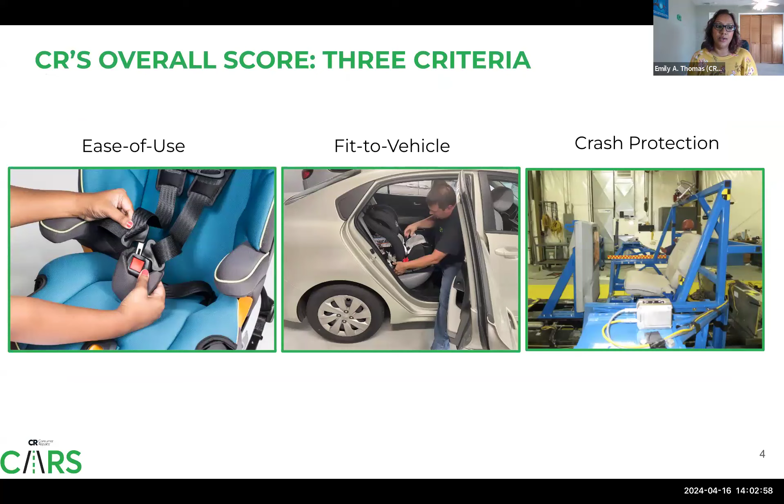So to start off, we'll begin with the child seat test program. Our overall score is broken up into 3 main areas. We look at ease of use, fit to vehicle, and crash protection. In our ease of use, we're really looking at how is the average person going to be using the seat? What are the potential areas for misuse? All the different adjustments that need to be made, are they easy to accomplish?

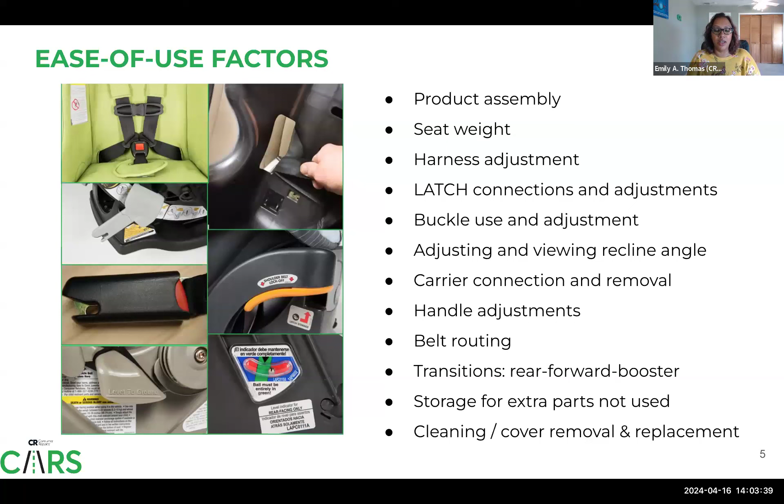Is it difficult to access these things like harness adjustments and crotch buckle adjustments, the lower anchors, where do you store them? Where do you keep the manual? Belt routing, all of these different areas. We really want to look to see where there's potential misuse opportunities and evaluate based off of that. We also look at the labels that are on the model itself.

One of the key things we try to drive home is making sure that if there is restrictions on usage on the seat, that the seat itself has that labeling right at those points of touch. So for instance, for all of the different inserts that come with your car seats, if you can only use them up to a certain weight limit, then we like to see that right there on the insert itself, because we all know that people don't hold on to their manuals, or they have it but they don't open it.

And so whatever can be put onto the seat labels itself that is really important for your everyday use and to ensure that there's no misuse, then we're looking for those things. Things like chest clip location, how to know when you should adjust the harness height, proper routing, all of these different areas. We do also give credit if the seat has Spanish labels, and later you'll see also if it comes with Spanish instructions.

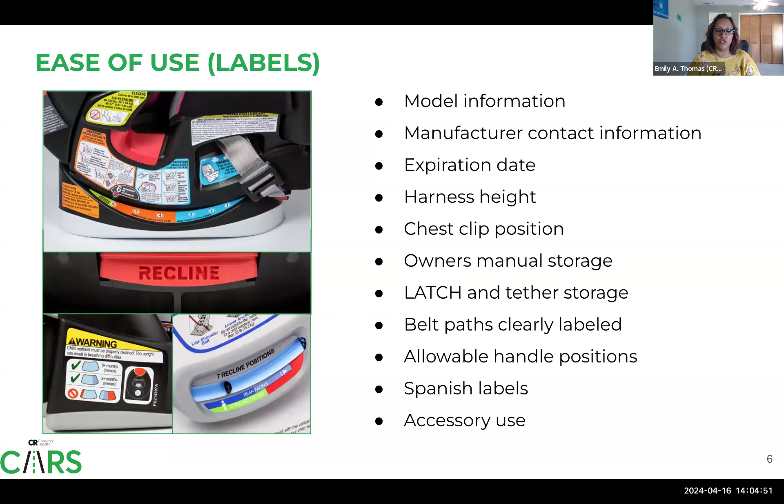So we do the same evaluation with the owner's manuals as well. If they do open the owner's manual, does it have all the information that they would need? And is it outlined clearly? Are there pictures? Do the pictures match the text? And do they match the seat? We do look for harmony between the labels and the owner's manual to make sure that there's no discrepancies that would lead to confusion.

We want to make sure that for soft goods, how to remove the soft goods for cleaning is described in the manual, how to clean them properly, and how to put them back. If you've taken soft goods off before, you know that sometimes taking it off is way easier than putting it back on, especially if the instructions only tell you to reverse your steps.

So we want to make sure that all these things are properly outlined in the owner's manual for the consumer. We also look for things like sources of installation help. So, does the manual tell them where they can find a CPST?

And we also look to see, with the labels and the manuals, are there videos that the consumer can access from the manufacturer? So sometimes they include online instructions or online video instructions. It has to actually be instructions about installation. It can't just be a marketing video. So we do watch to make sure that there's verified videos available from the manufacturer itself.

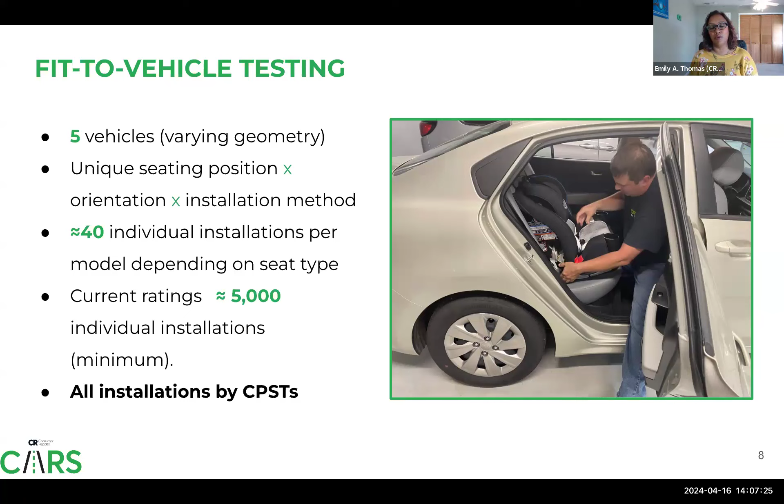And our current ratings has approximately 5,000 individual installations that go into them. And that's the minimum. Oftentimes we have to do multiple installs in the same seating position in order to see, can we get a better fit? Are there any tips or tricks that we can provide as well to help them get a better installation? And everyone on our team who does the Fit to Vehicle installations, they're all CPSTs.

large waterfalls, all the different things that make it really tough sometimes to get a good install, wide belt anchor spacing, perhaps top tether locations that are very close to the vehicle seat back, lower anchors that are close to the seat cushions, things of that nature. And so the idea is that if the car seat can be installed securely in these challenging vehicles, then the likelihood that you can get a good install at home in your car that's perhaps not as challenging is higher.

So we look at whether or not we're able to get a secure installation, but we're also looking at the car seat's compatibility with the vehicle. Is there enough room to get the installation? How does it impact the adjacent seating positions? Are you able to close the door if you have the seat installed in the outboard seating position?

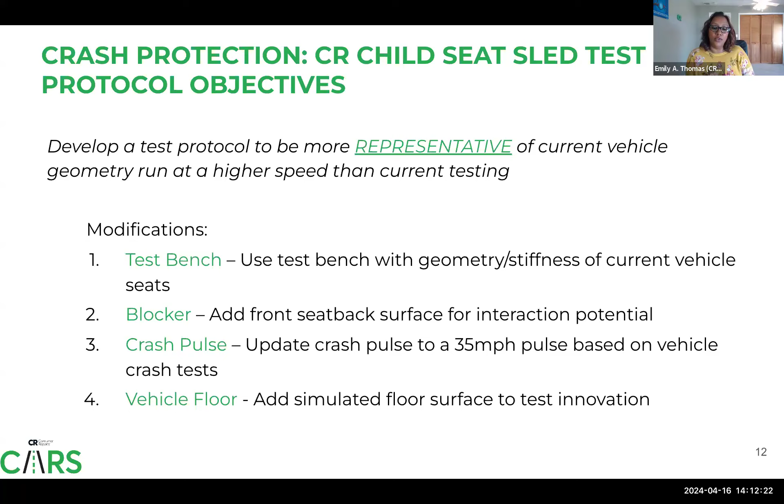Additionally, our crash pulse is a higher severity crash pulse than the regulatory tests. We use a 35G, 35 mile per hour pulse, and this allows us to differentiate seats compared to the regulatory minimum. And then lastly, we have a simulated floor surface to allow us to test additional innovations like load legs.

So we developed our blocker plate by using video analysis of the front seat movement in vehicle frontal crash tests. Essentially, it was designed to have built-in rotational capability. In a real vehicle, there is some flexibility to that front seat back during a crash. It will rotate forward during a frontal crash. We wanted to account for that on our sled, but it's too difficult to have that exact same amount of flexibility be repeatable for every test. So we built in the rotational capability as part of our test setup.

When we are installing the car seat on the sled, the blocker plate is set to 78 degrees. We then translate it fore-aft until it meets the manufacturer specifications for a rear-facing seat. So whether that is just touching, braced, a 1.5 inch gap, whatever it might be, we will translate the blocker to that.

And then after we bolt it down, we rotate it up by about 10 degrees, which accounts for approximately 4 inches of movement that you might see during a real crash. This allows the car seat to have that additional movement and the room for it that it would also have in a real crash. For forward-facing tests, the blocker plate is set at 28.5 inches from the lower anchors, and that's for all forward-facing tests.

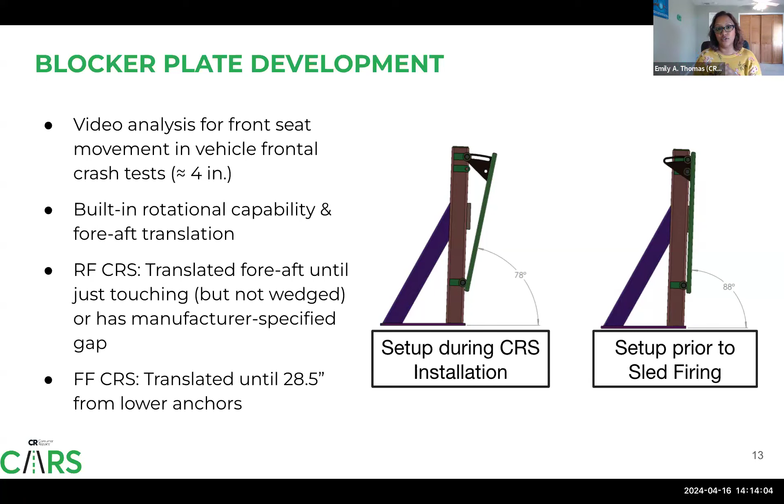Our simulated floor allows us to test innovations, like I mentioned, specifically load legs, and we wanted it to be representative of vehicle floors. In real cars, the vehicle floor is a much larger piece of metal with bumps and ridges. But because of the way the load leg interacts with the vehicle floor, it tends to be more of a point load. So it's okay to have a smaller piece for the sled purposes.

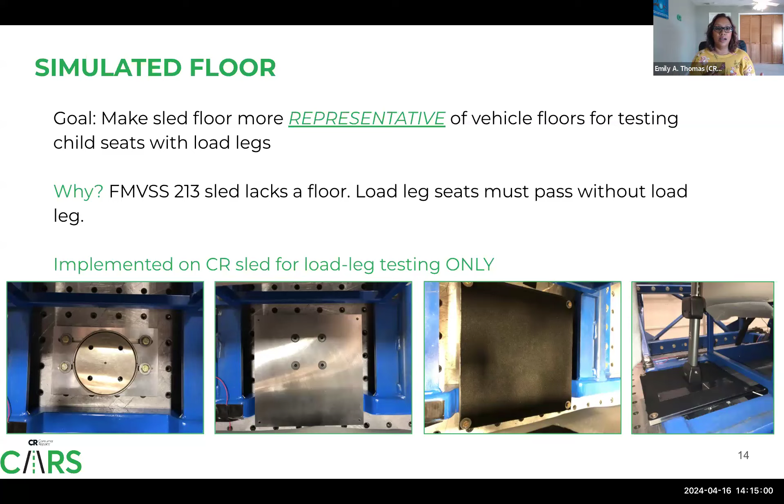Unfortunately, the regulatory test lacks a floor. So car seats that have a load leg have to pass the regulatory test with the leg folded, so they're not gaining the additional benefit that a load leg provides. But in our testing, we're able to test with it and see what that benefit is in the crash numbers.

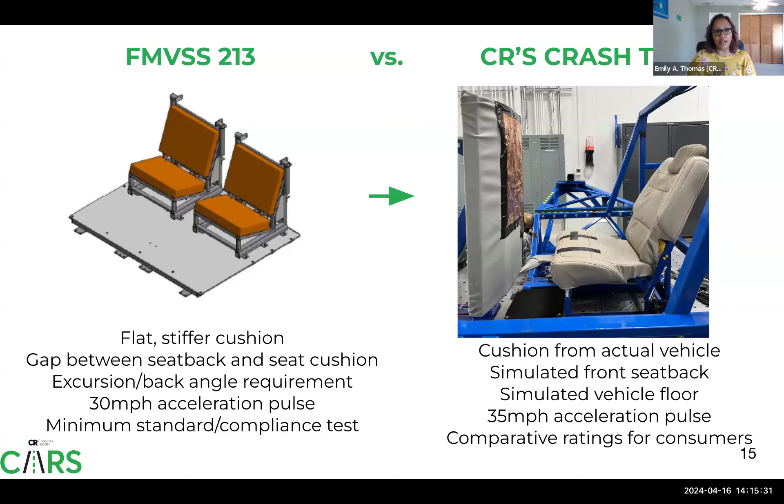So the key differences between our crash test and the federal standard are that we are using cushion from an actual vehicle, we have implemented a simulated front seat back, and we also have a simulated vehicle floor. We're running our tests at a higher severity, higher energy pulse, and we're meant to provide comparative ratings for consumers, unlike the regulatory test, which is a pass-fail test.

So why do we use a higher energy pulse? This is a quote from a paper discussing the NCAP, or New Car Assessment Program, which also tests at a higher speed than the regulatory crash tests. Really, when you have the regulatory crash tests at one speed, that's your compliance pass-fail. If you want to determine crashworthiness differences, you have to go beyond that minimum, beyond the regulatory standard. Raising the speed allows us to more easily distinguish any crashworthiness differences.

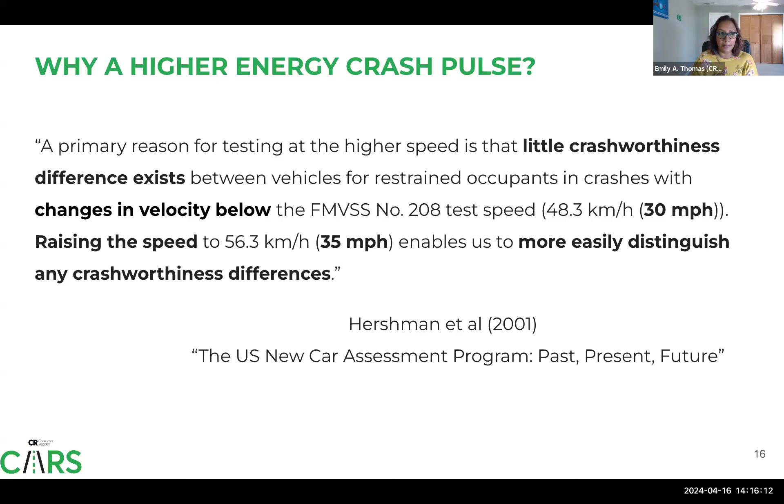So our crash protection rating is not a pass-fail test, as I mentioned. It's comparative ratings of relative performance within a peer group. So infant seats are rated against infant seats, convertibles against convertibles, etc. The three ratings that you can get are basic, better, or best.

And this is really helping us determine what additional margins of safety you are getting from the results of our crash test for this model. And just as a note, all seats that get a basic rating in our evaluation are still considered to be safe, because these seats still have to meet the minimum federal standard. We're making comparative judgments on additional margins of safety, not deeming them a fail.

Our crash score is based on statistical analysis looking at two main injury metrics. We're looking at head injury criteria and the upper neck forces, axial forces. We also look at head contact to the blocker for rear-facing models, and this is an additional deduction from the final crash score.

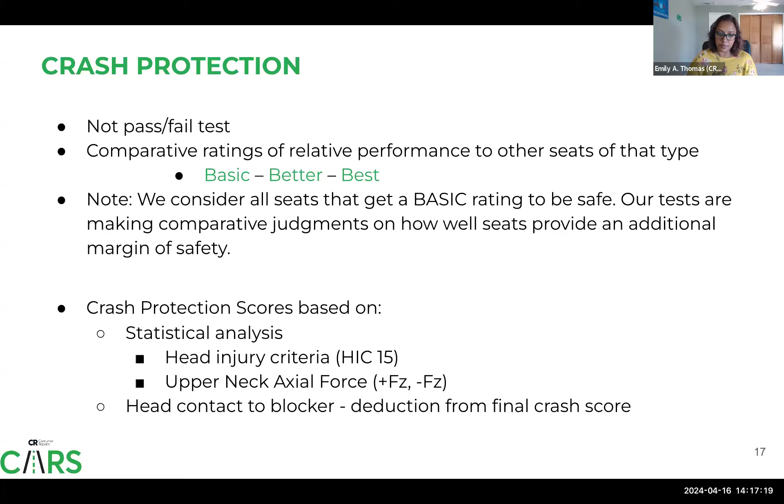So there are two main ways that you can get a basic rating. It can either be due to statistically significant higher injury metrics than your peer group, so the head injury numbers and the neck force numbers are a lot worse than the rest of your peers. Or it could be from a structural integrity issue that compromises the seat's ability to secure the child, or compromises the seat's ability to stay securely installed to the vehicle seat in a subsequent crash event.

And when I say subsequent crash event, what I really mean is that in the real world, we know that most crashes are multiple events, but in the laboratory, we can only simulate a very idealistic single event crash. So knowing that in the real world there's probably going to be a secondary event, we want to make sure that the child is still going to be properly retained by the child seat, or that the child seat stays secured to the vehicle seat.

So moving into how the ratings are. Our general philosophy is that if you can't use the seat properly or get a secure installation in the vehicle, then you can't expect optimal crash protection. So as a result, we weight ease of use and fit to vehicle higher than crash in our overall score. Our fit to vehicle ratings are broken up by belt installation and by latch install, and we do apply the latch limits to the fit to vehicle ratings.

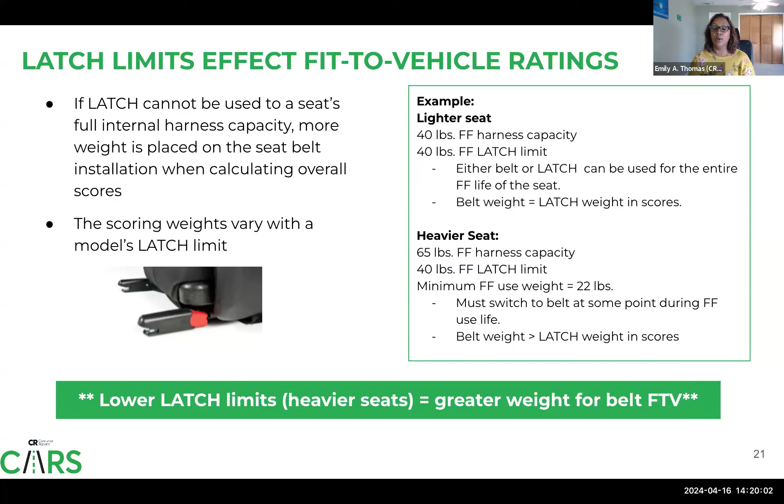But let's say you have a really heavy seat and you're going to have to make that switch from lower anchors to a seatbelt install a lot sooner because you're going to meet the lower anchor weight limit. In that case, we would weight the belt fit to vehicle score heavier than the lower anchor fit to vehicle score.

Okay. So with the launch and with the new infant car seat finder, we added 2 ratings and specifications to our ratings charts. And so one is our fit to vehicle carrier only rating. This is an independent rating that does not go into the seat's overall score, but really it is to help families that rely on rideshare or travel a lot, don't have their own vehicle, things of that nature, to be able to assess how well the infant seat that they have does for carrier-only installations.

Secondly, we added a specification called Good Small Car Fit. And what that is looking at is for rear-facing infant seats, how much front passenger room are you really able to get? So we know that for smaller vehicles, this can be really challenging for families, and we want to make sure that it's easy for them to know.

So we used a combination of data points for the infant category, looking at carry handle restrictions, as well as our fit to vehicle rating to see, in our fit to vehicle scores for each of the test cars, did we find that the front passenger room was cramped or unusable. Moving forward, as we expand this to convertibles and all-in-ones, we'll be creating a more standardized method that's more easily applied across the categories. So that will be coming soon.

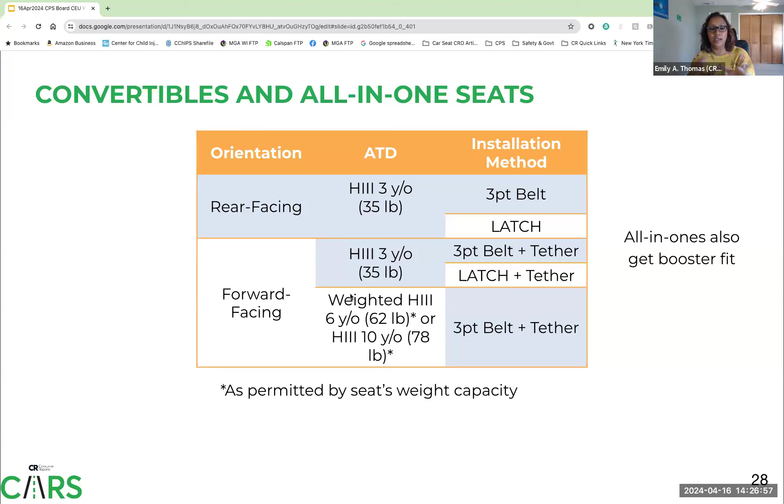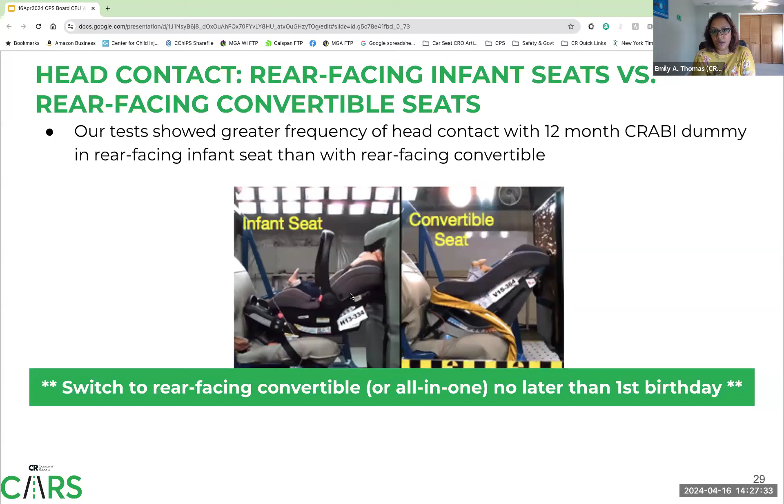One of the findings that came out of our crash testing when it came to rear-facing infant seats and convertibles was that we found a greater frequency of head contact with the 12-month CRABI in a rear-facing infant seat than we did see with the rear-facing convertibles. And so as a result, our recommendation has been for quite a few years now that if parents have not done so already, they should switch their child from a rear-facing infant seat to a rear-facing convertible or all-in-one no later than the child's first birthday to give them that additional head protection.

So the toddler booster matrix, which again, soon to be the harness booster category, is all forward-facing with the 3-year-old, 6-year-old, and the weighted 6 as applicable. For booster seats, we no longer do any crash testing for that, just because the design of our current crash test really helps to differentiate margins of safety for harnessed seats. But with the booster, you're really using the vehicle's restraints, and so the sled environment that we have, or the test that we have right now, is not a good differentiator.

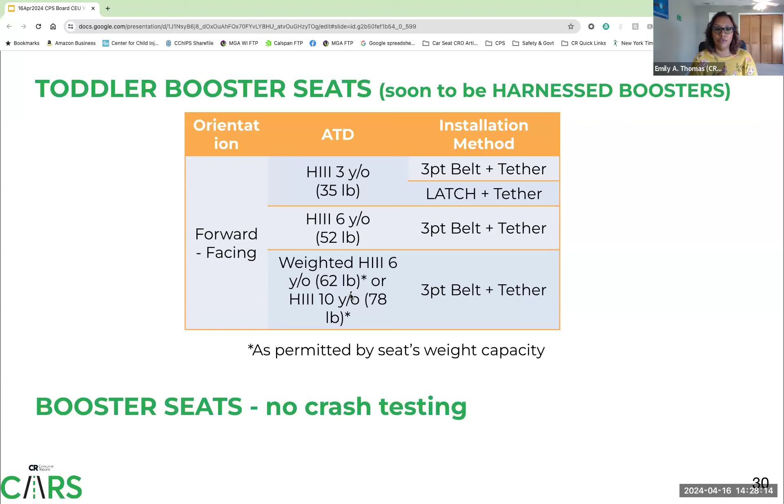But from our Booster Fit program, we have found that when you're looking at belt fit for high back to backless models, and you're comparing the belt fit in high back mode versus the belt fit in backless mode, when you remove the back off of those models, there's quite a few things that happened. You're losing that shoulder belt guide, which can really impact the shoulder belt fit, right? Many of them come with that backless belt clip. However, we know that most people don't use them, that the moment that the child moves, they fall right off the shoulder, and so they're not very effective.

We also know that the lap belt really suffers because when you remove the back off of these models, now the child is sitting further back by several inches against the vehicle seat, but the lap belt path for the backless portion of the model has not moved. It's still in the same place. And so now the child is sitting further back. The lap belt path is still pretty far forward, and now the belt is really sitting across their thighs and not across the strong parts of their hip bones.

You lose those side wings that kids are more accustomed to in the high back mode, which personally I found for my son when he went from his forward-facing harnessed seat to high back booster, he really liked having the side wings for additional comfort. It was what he was used to. He was used to that kind of cocooned environment. And also that side impact protection that comes with having those wings.

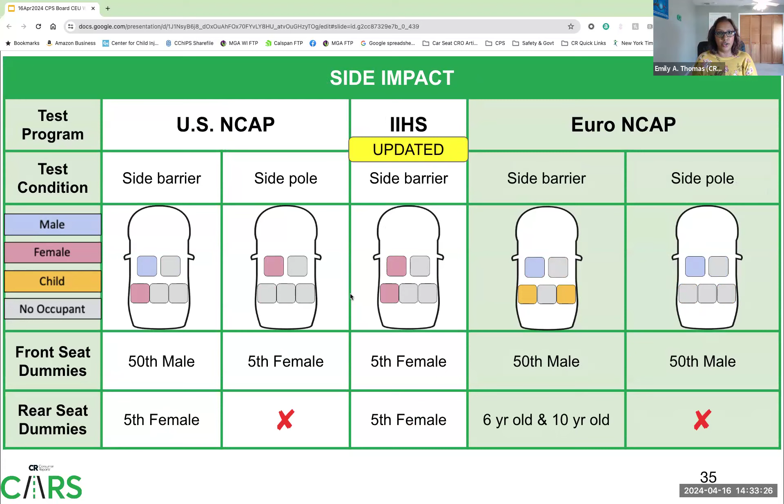So looking at the state of the industry, if we look at safety technologies that we see in the front seats and have proven effectiveness, and now looking to see their implementation in the back seat, how much of the market has them. Looking over the past couple of model years, I cross-referenced the models that we have listed on the Consumer Reports website with the NHTSA Safer Car database to get these numbers. So this is not representative of volume or sales, but rather just the models that are available in the market.

And so really between model year 21, when we started this program, and model year 23, we see almost a 20% increase for seatbelt pretensioners and load limiters in the rear seat, which is great. Side torso airbags don't have as much of a jump, but we also know that with the updated IIHS test manufacturers are continuing to be held to a higher standard there, and that they're improving side impact protection for rear occupants as well.

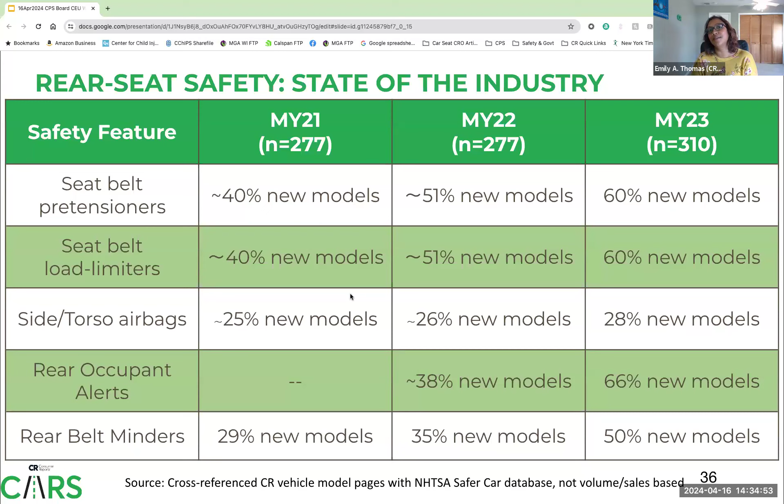For rear belt minders, almost 50% of new models of model year 23 had at least some type of rear belt minder. And for rear occupant alerts, there was quite a jump between model year 22 and model year 23 for vehicles that had even a basic rear occupant alert, which we're really excited about. So these numbers are improving. There's lots of room for more improvement, but it's exciting to see that we are making progress.

So our rear seat safety score is really comprised of two components, child safety and rear occupant protection. We have been evaluating a few of these things for many years. And then in 2021, we launched this score and made it a more comprehensive, holistic test. So we're looking at the presence and absence of features, and also at the performance of some of these systems. Under child safety, there's child seat fit, performance, booster use, and then rear occupant alerts, which is presence and absence as well as performance. Under rear occupant protection, there's rear head restraints, rear belt minders, which is also a performance-based evaluation, and advanced restraints, which is just presence and absence.

So we'll start off with harness child seat fit. This is really focused on seatbelt installations in our evaluations. That's because we know that the IIHS has done a great job of improving LATCH accessibility and labeling through their ratings program, and many manufacturers responded very well to that. But we also know that you don't have lower anchors in every seating position, and there are weight limits to the lower anchors. So eventually families will have to move to a seatbelt install. They might need to do a seatbelt install if they're using a center seating position.

And so we want to make sure that regardless of where they are in the vehicle, they can get a secure seatbelt installation. So we're doing installs in every test car, in every unique seating position in the rear, and every orientation of the seat. We use 2 infant seats that have varying base designs and a convertible car seat for these evaluations. We also look to see if the vehicle manual matches the rear seat geometry, just to ensure that we're not going to have additional misuse and confusion.

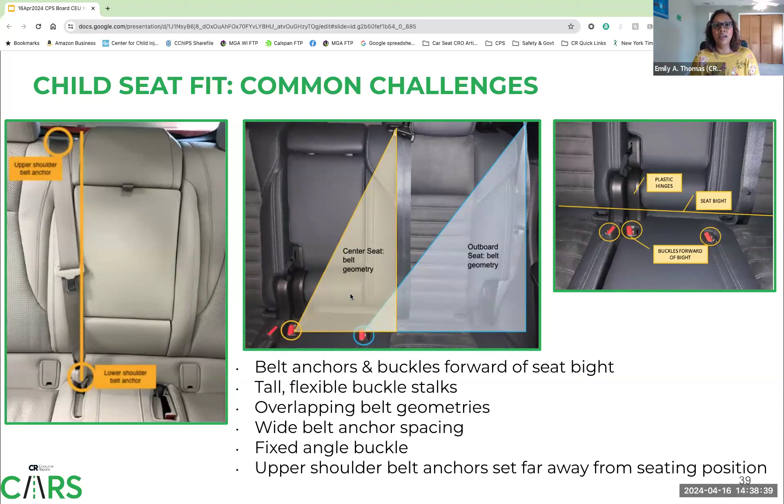Looking at booster fit, we want to make sure that you can get a proper booster fit and easy buckle access. So we do look at the compatibility between boosters and the vehicle seat, head restraint interference, stability on the vehicle seat. Do the bolstering and the cushion height differences between the center seating position and outboard seats contribute to instability of the booster? And just making sure also that the booster doesn't overlap with any adjacent seating positions. So when we do our evaluation, we're really treating each seating position independently and trying to see how this would impact if you were trying to have somebody else sit next to the booster or install another child seat there.

So again, some of the common challenges that we see here: we often see that the booster footprint can be wider than the space that's available on the seating cushion, especially if there are really prominent bolsters. It can make it so that that seat cushion has a very narrow footprint available even in those outboard seats. We can find that adjacent buckle hardware will push the booster forward and keep it from sitting flush against the vehicle seat. We often find interference with the vehicle head restraint.

If we have to remove the head restraint in order to get that booster flush against the vehicle seat back, then that's deductions, because we know that people are going to take off those head restraints and either throw them in the car somewhere and it's now a projectile, or they're going to put it in their garage, never to be found again when they need it for a belted occupant in that seating position.

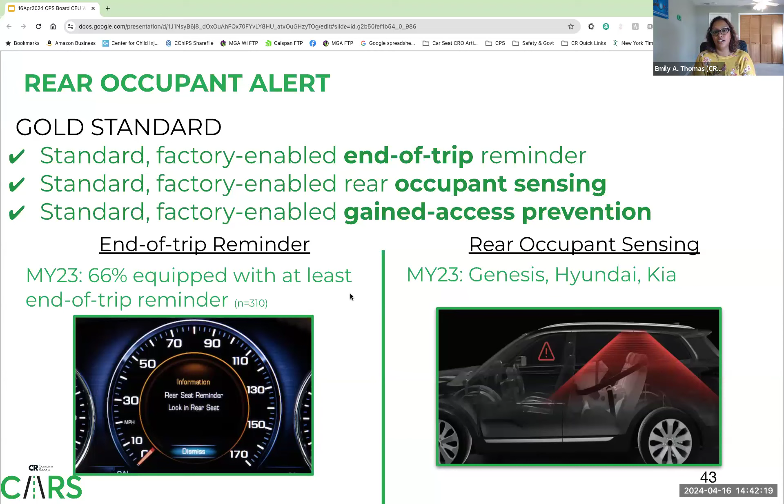So for the rear occupant alert, the end of trip reminder, we give credit if the vehicle has the system, but beginning with model year 24, in order to get that credit, the system must be standard equipped and factory enabled. So that means that when the consumer gets the vehicle, the system has to already be turned on. If you have to turn the system on yourself, there's no credit given to that vehicle.

And really that's because we know that people don't believe this can happen to them. So the likelihood that they're going to take this very proactive step to go through the many vehicle settings and find the system, which is often really buried and in unusual places, and then turn it on is pretty slim. So it's better that this system is already activated for the consumer.

We like to see these systems be both visual and audible because we know that triggering multiple senses is more likely to grab the driver's attention. If they exit the vehicle and have not accessed the rear and they go to lock the car, then there should be an additional external audible alert. And really this is to just try to intervene at every possible moment to prevent them from leaving the child in the vehicle.

We also test for a multiple drop-off scenario. Many of the cases that have occurred are because there was an older child that is dropped off at school, and now you still have a younger child in the vehicle, but they're the one that gets unintentionally left behind. And so even if the rear door is accessed during the trip, do you still get a consistent end of trip reminder when you turn off the ignition?

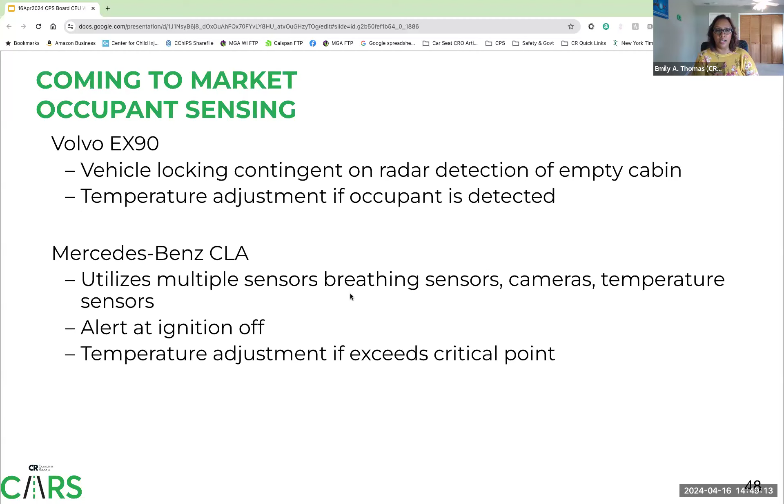So coming soon to the market, we have heard about the Volvo EX90, which incorporates radar sensors. The vehicle locking is going to be contingent on radar detection of an empty cabin, and it can temperature adjust if an occupant is detected. The Mercedes CLA is supposed to utilize multiple sensors: breathing sensors, camera, temperature sensors. It'll give you that alert at ignition off, and then also it can do a temperature adjustment of the cabin if it exceeds a critical point.

So moving to rear head restraints, the federal mandate says that outboard seating positions have to meet a minimum head restraint height of 29.5 inches. But we really want to make sure that that's applicable to every seating position. We've all gotten into cars where the center seat either doesn't have a head restraint or has a very low head restraint. So we really want to make sure that there's adequate head restraints in all seating positions. We want to see that the design encourages the use of the head restraint, but doesn't prohibit secure CRS installations. Again, we don't want head restraints being removed from the vehicle.

Some manufacturers implement stowed designs to improve driver visibility. And in order to get credit for a stowed design in our evaluation, in the stowed position, the head restraint has to be uncomfortable and force adjustment for proper use. So designs where the head restraint flips forward or is overlapping significantly with the vehicle seat back, those are really uncomfortable for someone to sit against and not realize they should adjust it. But designs that flip backwards can be quite comfortable, and the person doesn't know that their head restraint is not properly suited for them.

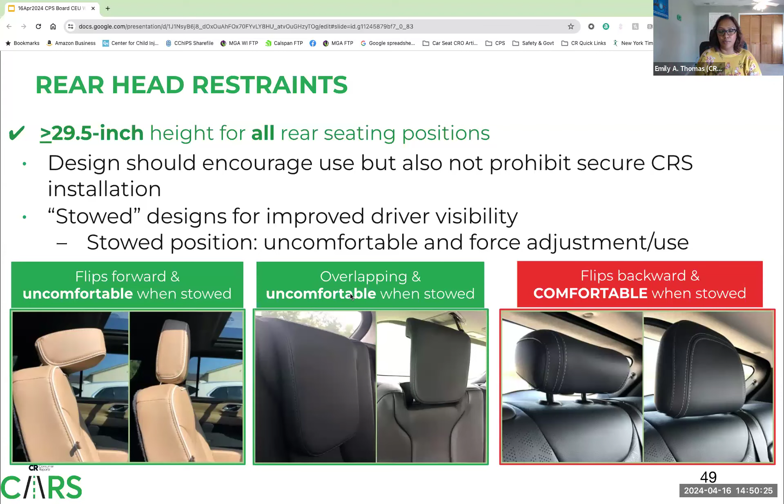So moving to rear belt minders, in September 2023, CR did another American Experiences survey, and we asked questions about rear belt minders to understand whether or not people have experience with them in their cars and how it might impact their behavior. 40% of American drivers say that they have a rear belt minder in a car that they drive regularly, which was very promising for us, very encouraging. And we asked them whether or not the reminder makes them more aware of their rear passengers' seatbelt status, and 74% of them said that it did. So that is also encouraging that rear belt minders are doing their job. It's helping the driver to be aware of the restraints in the vehicle and how they're being used.

Around 3 in 4 drivers say that their passengers would buckle up if asked, and this is regardless of whether or not they have a belt minder in their car. Some of the data that we have from this study suggests that rear seatbelt alerts make some drivers more likely to ask their passengers to buckle up, which is also encouraging.

So in our belt minder evaluation, we are looking again for standard equipped factory enabled systems, and really we are looking for a 2-pronged system: buckle up reminder and an unbuckled status alert. Buckle up reminders should be at ignition on. It's telling you to put your seatbelts on. We want them to be visual and audible to really grab the attention of the driver and the rear passengers. It should escalate if the rear passengers remain unbuckled, and it should be prominently visible to the driver so they

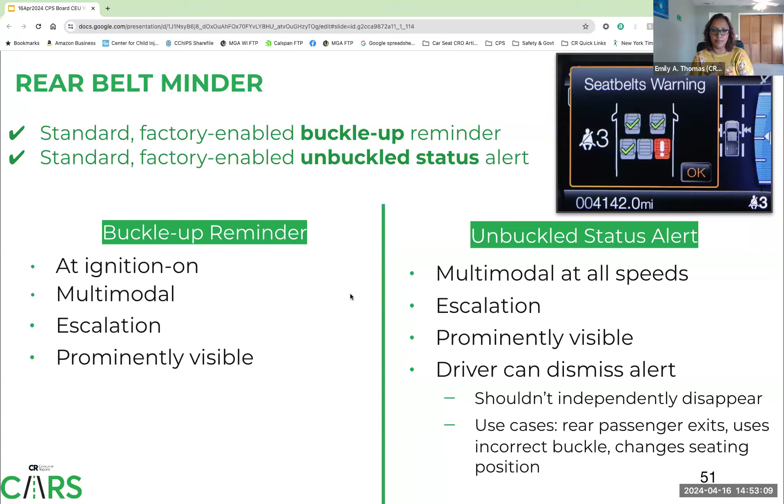We feel very strongly about buckle up reminders because while it's great to know that somebody unbuckled during the trip, if they never buckled up to begin with, an unbuckled alert is kind of useless. So we really want to encourage people to be buckling up, which is why we feel so strongly about having the buckle up reminders. Most of the buckle up reminders for model year 23 are visual only, and we are hoping to see that change. For the unbuckled alerts, most are visual and audible, but only some of them have escalation.

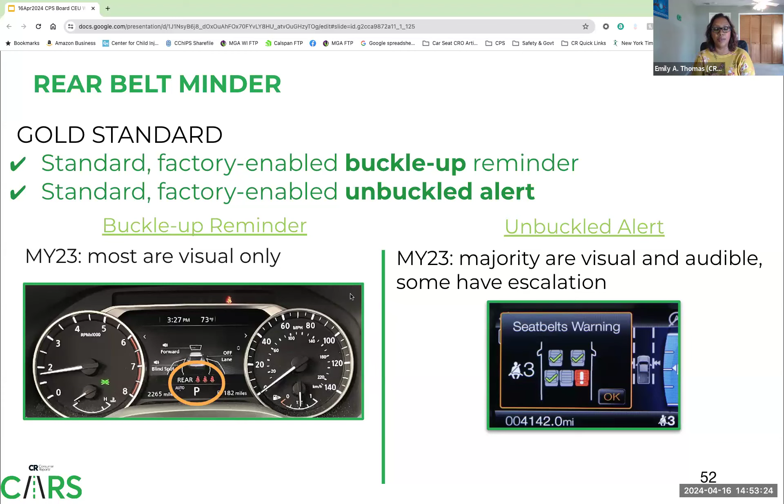The IIHS does a rear belt minder evaluation that primarily focuses on front seat belt minders. They do also look at rear belt minders, but the requirements are slightly different. Ours go a little bit further than what the IIHS is doing, and so together it should provide really robust belt minder systems.

So last but not least, advanced restraints. We really want to increase belt usage by improving belt fit and adding crash protection. So we do look for adjustable anchorages, advanced seatbelt technology like pretensioners and load limiters. We do look at airbags to kind of see what manufacturers are putting in. As I mentioned before, there is work that's being done with the IIHS that is also improving crash protection for the back seats.

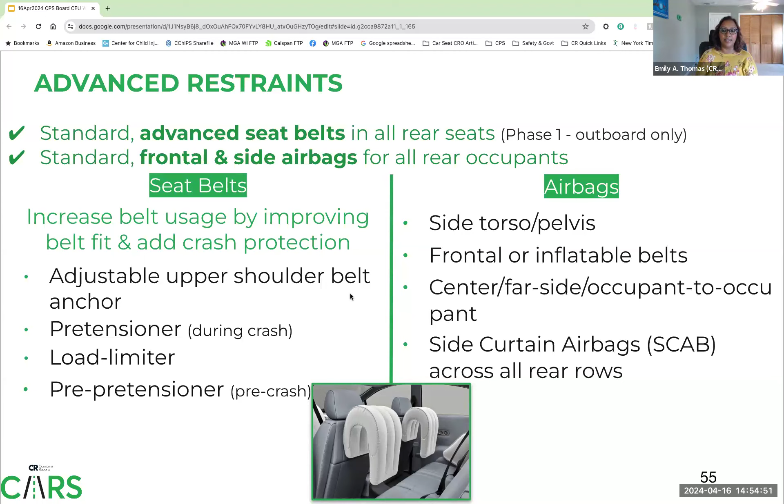In your vehicle owner's manual, which is again another thing that you can help with the families at checkpoints, is helping them understand where the airbags are in their car and which seating positions have advanced restraints. So typically on the page that describes the airbags in the vehicle, there will also be language about the side torso airbags in the back seats, as well as any pretensioners that may be available in the rear seating positions. And this is helpful for parents and caregivers to know. Perhaps they want to put their older children or their booster age children in those seating positions so that they can really benefit from the advanced restraint systems.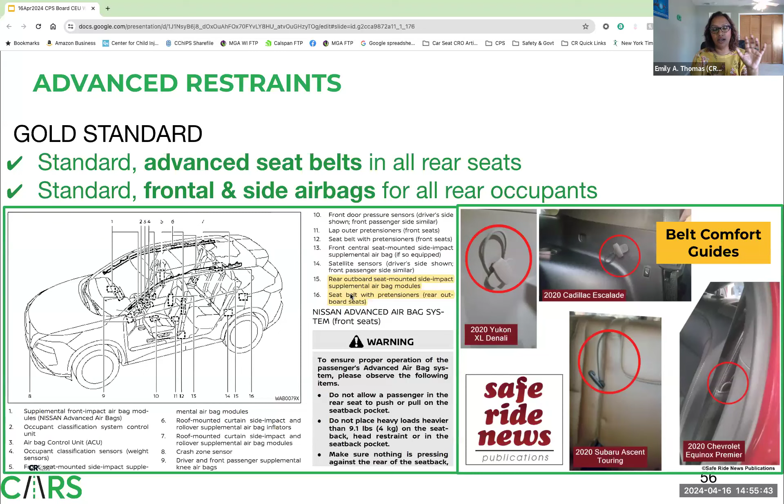Here are some images of different belt comfort guides from our friends at Safe Ride News. They have a great resource on their website that gives you descriptions of what some of these different safety systems look like.

So the IIHS updated their moderate overlap frontal crash test. They put a rear-seated 5th percentile female dummy behind the driver. This dummy is also used often to represent a 12 to 13-year-old. And as a result of this test, many manufacturers are implementing advanced restraints in the back seat. They're improving their backseat safety.

And the IIHS also, for the 2024 Top Safety Pick Plus criteria, vehicles need to have a good or acceptable rating in the updated test, which includes this rear-seated dummy. So together between the IIHS and the Consumer Reports ratings, we're really trying to incentivize manufacturers to be paying attention to the rear, implementing safety systems that are proven and effective.

So our rear seat safety rating, as I mentioned, is broken up into the overall score and then the child safety and rear occupant protection scores, and that's what you'll see on our website. So on the vehicle model pages under ratings and specs for free, you'll be able to see the rear seat safety scores. You can find the overall score, the child safety score, and the rear occupant protection score. And then we also have information about what types of rear occupant alert and the belt minder on that vehicle.